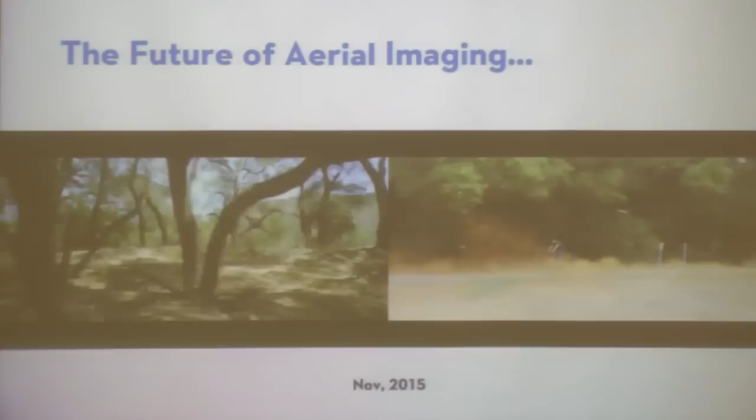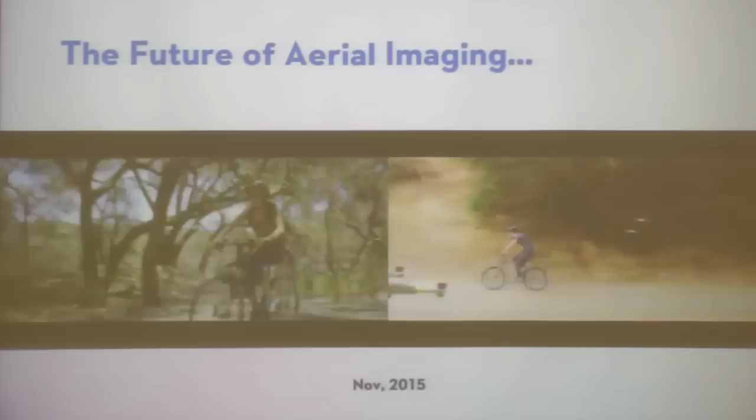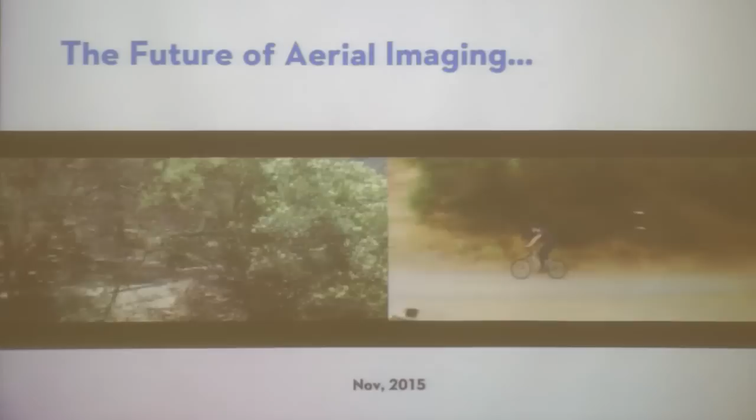This video is an idea that we want to show of what we think of the future of aerial imaging. We think users should focus on content instead of manually operating the system. We want the drone to fly anywhere, even in dense natural environments, and even beyond visual distance. Finally, we think it's very important for a drone to be controlled without a remote controller, but to interact with users in the most natural ways, such as gestures. At this point, actually, we are not making a flying camera.

We are rather making flying robots. DJI, as always, we think ourselves as a robotics company. And Phantom X is not merely a concept, it's a milestone on a roadmap, and we are working on this road steadily.

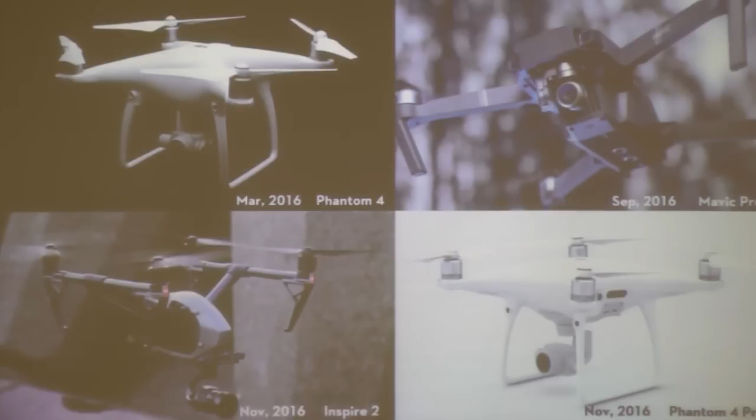So in the following year, 2016, we released 4 products that integrate computer vision and other sensoring technologies that enable them to perform autonomous flights by themselves. These products are Phantom 4 and Phantom 4 Pro, Mavic Pro, and Inspire 2. They come in different sizes and shapes, and their prices are different, and their target users are different.

For example, the Mavic is really small and it's foldable, so it's convenient for people to travel and for people who do outdoor sports to carry it. Inspire 2, on the other hand, is a very large and expensive drone with very professional cameras and other functionalities. Those are for people who want to have high quality video shots.

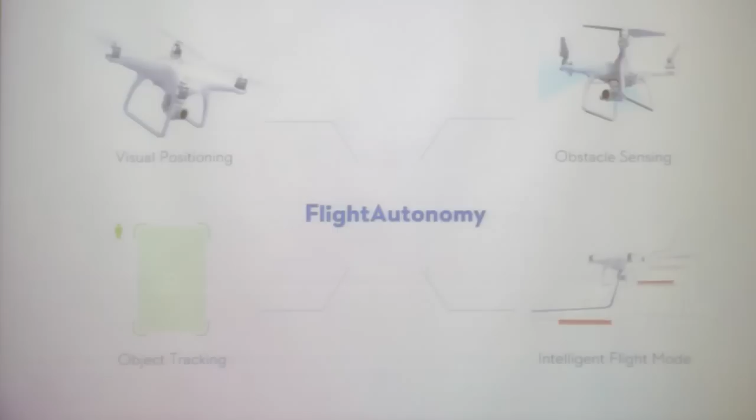The core component of all these systems is called flight autonomy. It's a component that enables drones to be able to visually position themselves in GPS-denied environments, and is able to do object tracking and obstacle sensing. And we built some intelligent flight modes on this component. If we see it from an academic way, then these functions correspond to some technologies such as visual odometry, multi-sensor fusion, depth perception, and also deep learning-based object tracking and detection.

I will introduce these functionalities in the following slides. The first fundamental thing is we build a specialized hardware that contains a bunch of sensors, including multiple IMUs, barometers, magnetometers, and a lot of cameras.

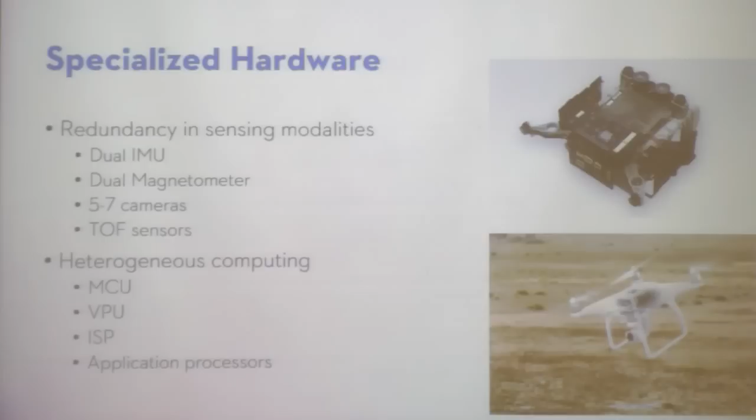And we have a heterogeneous computing platform, consisting of microcontrollers, special vision processing units, image signal processors, and also application processors. In total, there are 24 computing cores on this hardware platform, and we're able to process all the sensor data simultaneously and fully on board.

The first technology we implement on this platform is multi-camera and visual inertial combined visual odometry. We process image streams from 6 or even more cameras, and this image stream will be processed by the hardware, and the result is fused with GPS, sonar, and other sensors to get a full state estimation of the entire system.

The most important part is stereo vision. Actually, the 4 cameras on the system form 2 pairs of stereo vision. One pair is downward facing, and another pair is forward facing. On Phantom 4 Pro, actually, we have a backward facing stereo vision, so in total we have 3 pairs of stereo visions.

As some of you may know, working with stereo vision cameras is troublesome sometimes because the relative position of 2 cameras is critical for your algorithm to perform precisely. When we do research, we know we can always do extrinsic calibrations using a chessboard. But for our product users, people who don't know computer vision, they don't know how to do extrinsic calibrations.

A better example, an interesting corner case, is a person standing still who crouches down. Our deep learning algorithm has a bounding box around the person. If the person crouches down, the bounding box shrinks. At the same time, if the person suddenly runs to a far place, the bounding box also shrinks.

For a monocular-based deep learning algorithm, we cannot tell whether the person has crouched down or moved to a far place. If our controller is aggressive and the person crouches down, the drone might start to accelerate, which can be very dangerous. Therefore, the controller has to be conservative when tracking a person, and able to use other techniques to distinguish whether a person is really moving fast or just crouching with deformation.

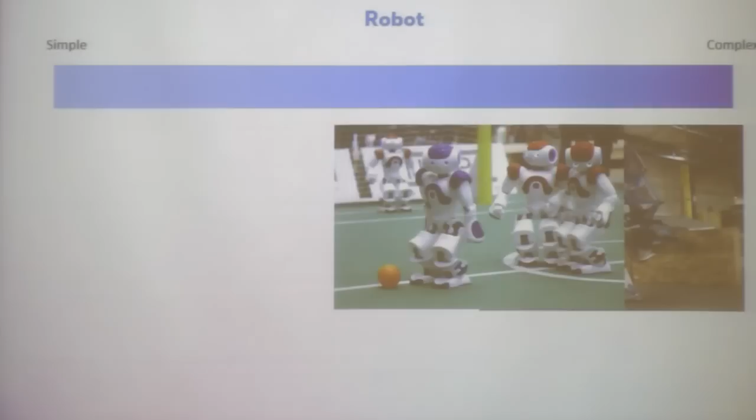We have another spectrum to measure the complexity of robots. Humanoid robots are obviously the most complicated and difficult robots. There are other humanoid robots for simpler applications, for example, football or soccer. DJI drones are also robots, but with simpler configurations. I would point out that a robot built in a lab is always more complex than a robot already in mass production, because in manufacturing industry we have different ways to reduce the complexity of robots. There are also extremely simple robots, for example, Lego robots for kids to study robotics.

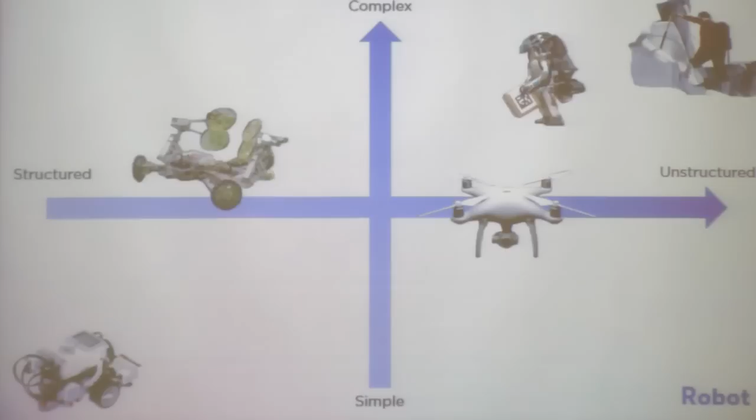If we combine the spectrums together, we get a coordinate system that intuitively helps us evaluate the complexity and difficulty a robotics application can have. On this coordinate system, the third quadrant contains simple and easy to make robots. In the first quadrant are very complicated, very high-tech robots, and human beings are obviously the most complicated ones in this coordinate system. There are drones and ground robots serving different purposes, and we see that we move robots from the third quadrant toward the first quadrant—that's a gradual, improving progress.

We can see this graph in another way: there are tremendous numbers of applications we can build for robots. There are also a lot of different robotics competitions that have emerged in the past decades. We've observed many good robotics competitions where people build robots, and the competition really helps the growth of technologies. We can also place the difficulty of these competitions and the robots involved on this coordinate system.

We have BattleBots, a competition for entertainment where RC-controlled robots fight with each other fiercely. We also have very difficult competitions such as the DARPA Robotics Challenge, where humanoid robots have to work in a nearly unstructured environment to finish a number of complicated tasks. We also have educational competitions such as RoboCup, where robots play soccer with each other. The International Aerial Robotics Competition is famous in the drone research community—it's a competition with a long history that really helps the development of drones.

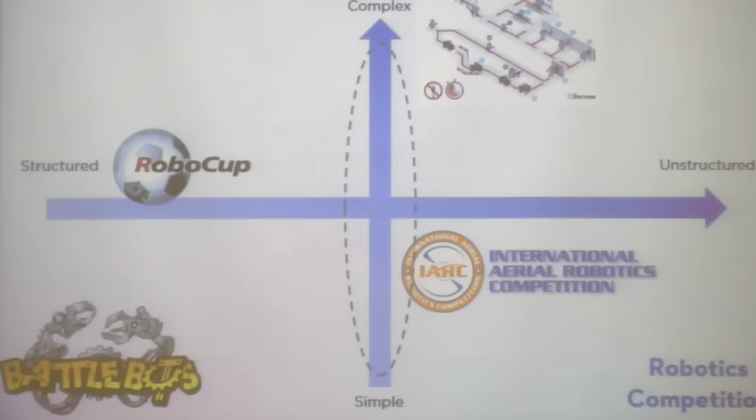For these competitions, we want to ask: even if we don't know what robotics applications we want to work on, we can create a robotics competition that roughly covers this range, meaning we have a relatively fixed environment where we let people build different robots and use this competition as a benchmark for technologies.

That's the purpose of RoboMasters, a competition we made that we hope can sit at the origin of this coordinate system and serve as a benchmark for different robotics technologies.

Next, I will use a video to better help explain the competition. This video is made by The Verge, a US media outlet.

4, 3, 2, 1. This is the world's biggest, most complex, and completely over-the-top student robotics competition. Over 5 days, students from 200 universities around China compete in front of tens of thousands of fans, while millions more watch online. The whole thing takes place inside this colossal stadium in Shenzhen, an arena that usually hosts the country's biggest rock stars.

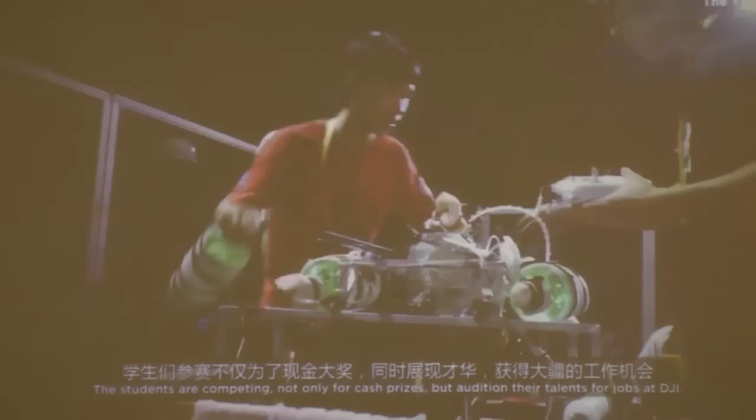It's all being funded by Dajiang Innovation Science and Technology Company. You probably know them as DJI, or at least you know their flagship product, the now iconic Phantom drone. The students are competing not only for cash prizes, but a chance to audition their talents for jobs at DJI. DJI, on the other hand, wants to use this competition to become the most successful robotics company in the world.

This is RoboMasters. This competition is like a battle between robots, so we make some robots to fight against each other.

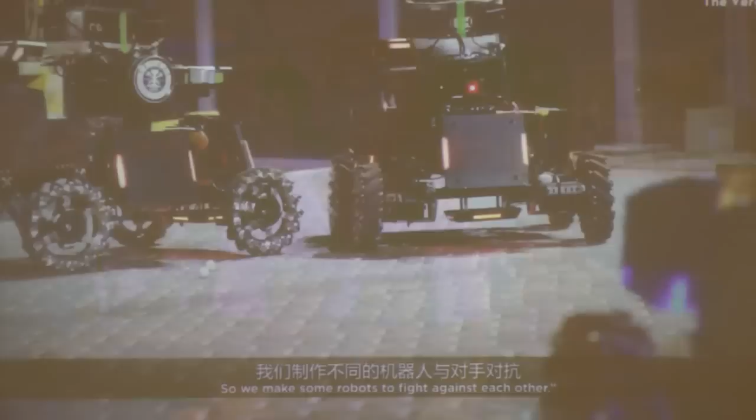Each match pits 2 teams of robots against each other. The units maneuver around the field, collecting power-ups and ammunition, ideally without tipping over. The goal is to reach the opposing team's base station. The robots can shoot at each other with cannons, aiming for small pressure-sensitive plates. Enough hits on those plates, and the bot automatically shuts off.

The teams can also successfully deplete the enemy base station of all its health and win a sudden death.

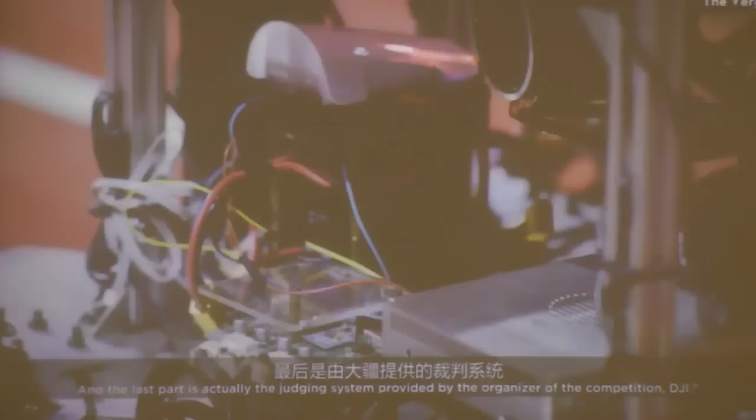Each team will build their own robots, mainly consisting of 3 systems: the driving system, which has 4 wheels to enable the car to move around; the weapon system; and the judging system, provided by the organizer of the competition, DJI.

The judging system consists of different components: sensors to detect incoming damage, sensors for monitoring speed, and cameras.

The view of the camera is transmitted back to the operation room, where the operators use only this first-person view to move their robot.

Every team has 8 robots, including 4 infantry, a hero, a drone, and a base, plus a station that can provide bullets, like a recharging station.

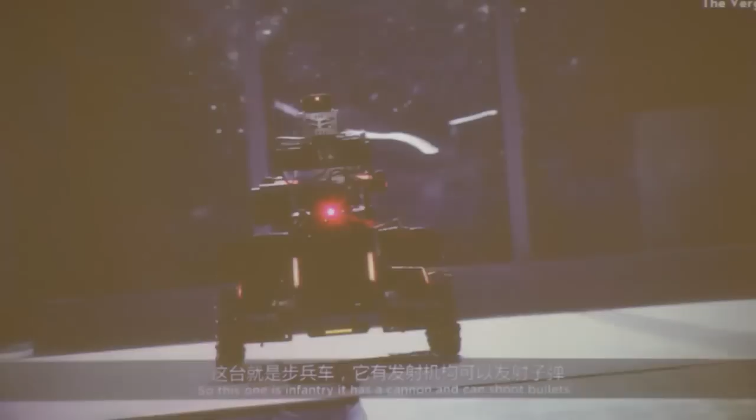This one is infantry. It has a cannon and can shoot bullets, coming from here and shooting out there.

The small infantry robots can only fire little rubber pellets, while the drone and the hero can use golf balls, doing much more damage with every strike. Golf balls are tough to get, and that's on purpose.

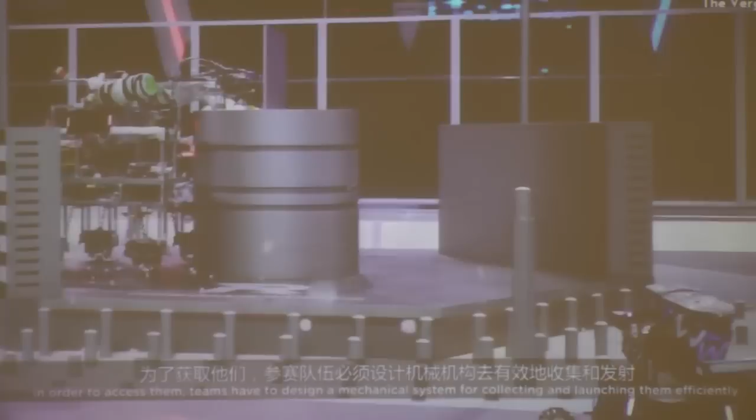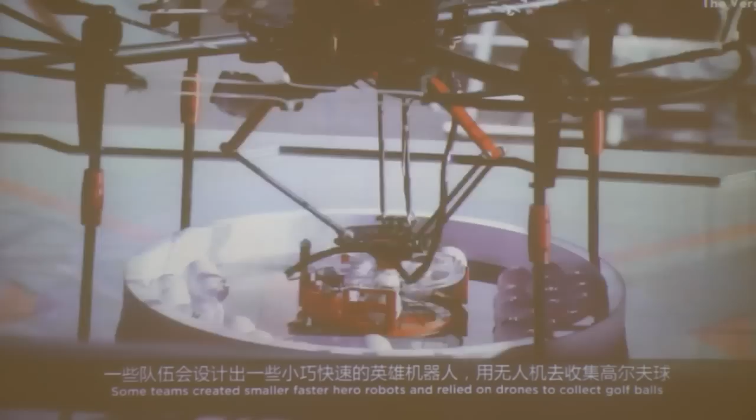In order to access them, teams have to design a mechanical system for collecting and launching them efficiently. Teams that were reliably able to get the golf balls were consistently able to take out the enemy and win the match. Some teams created smaller, faster hero robots and relied on their drones to collect golf balls, using the aircraft to arm their hero or bomb the enemy base.

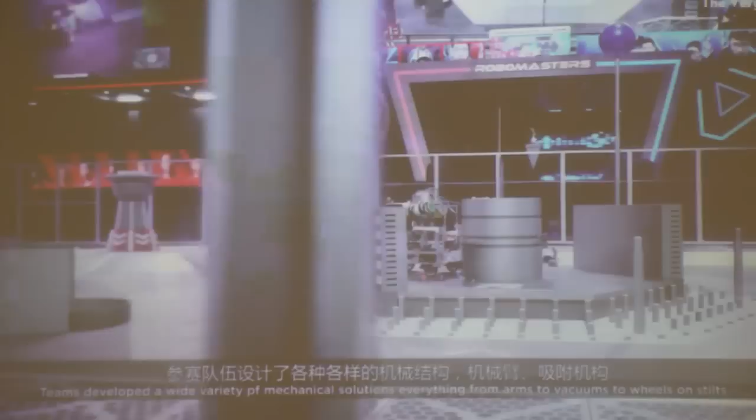Others built large hero robots that could scale a central island, climbing over a sea of spikes. Teams developed a wide variety of mechanical solutions, everything from arms and vacuums to wheels on stilts. The mechanical engineering that went into the tournament was always a big hit with the crowd, but the really high-tech stuff was actually happening out of sight in the software.

We forced students to design the base robot as fully autonomous. The base robot can shoot 17mm plastic balls as well, but it has to do it automatically. In this way, we encourage students to involve these high technologies.

At RoboMasters, computer vision was used to enable an autonomous base, allowing it to identify the enemy and return fire without human help. You could see the way the tournament was designed to make stars out of nerdy teenagers.

The competition featured live feeds of them operating their robots, documentary films on their preparations, and even an anime series that turned contestants into action heroes. RoboMasters made these students larger than life.

I was pushed to the front of the spotlight, right in the center. The first time I saw the poster, I was also a bit shocked. It's amazing to me, and I believe it's amazing to a lot of other people too, especially young children.

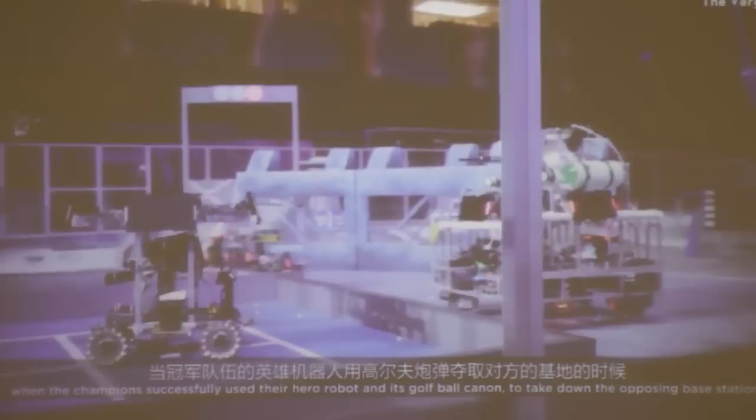Could RoboMasters ever be as popular as a mainstream sport? Will kids one day aspire to be engineers the way they aspire to be rock stars? That remains to be seen. But in the final moments of the competition, when the champions used their hero robot and its golf ball cannon to take down the opposing base station, and the crowd went wild, it sure felt like a roaring success.

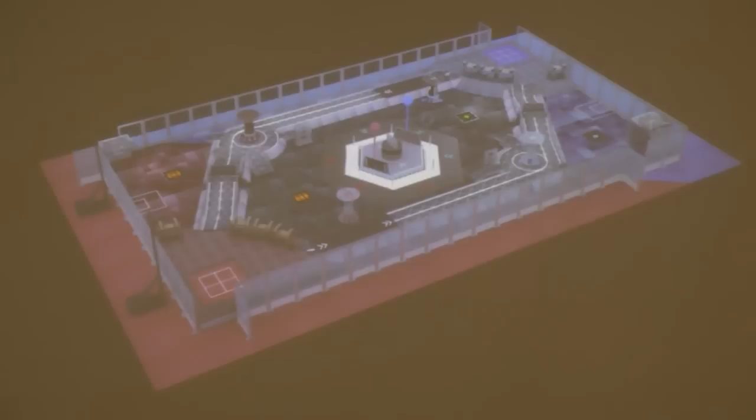What is this competition really about? We designed this place where robots fight with each other. The size of the competition field is roughly the size of a basketball field, and the robots move in the game field. The judge system connects the robots into a central server, and the position of those robots is displayed on the minimap.

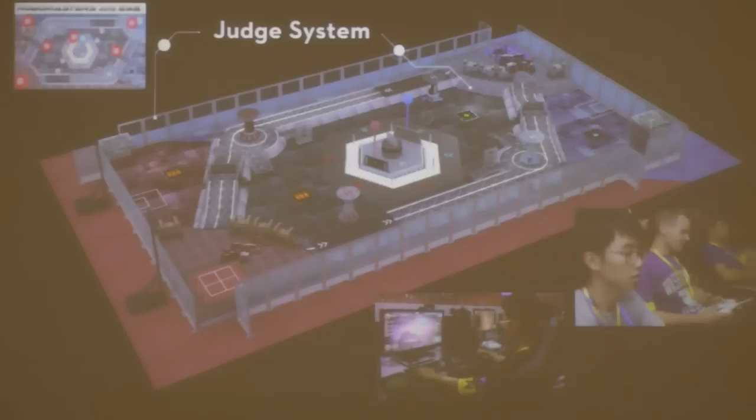We developed a localization system to track the position of all these robots and display them for the audience. Then students just sit next to the game field and operate their system. We have Wi-Fi connections and image transmission technologies to transmit back the image view from their robots.

We carefully designed the game elements in this field to make it a roughly structured environment, but with some uncertainties. All the game elements and the size of the game field are known to the contestants, but those small bullets, golf balls, that teams need to collect bring uncertainty into the competition.

The video explains the role of DJI in this competition very well, but we also did more behind the scenes. We make some components such as motors and development boards, and also a sample robot for students to get a basic idea of how they can get started.

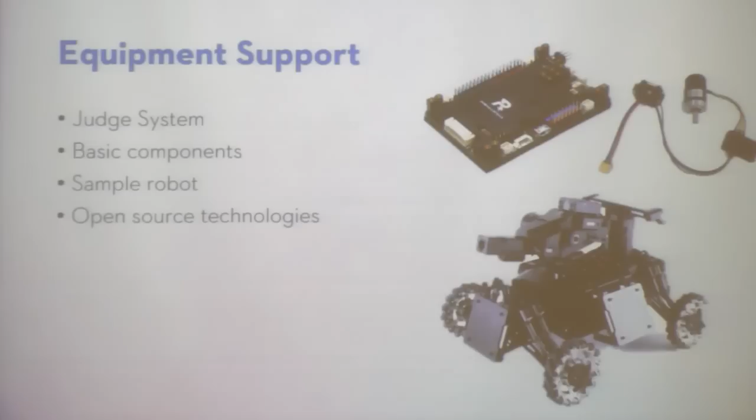There's also the judge system. In the video, it mentions that the judge system has sensors to detect pressure changes. We also built our own image transmission link that is nearly identical to the technologies we use on drones, so that students can get a very good feeling when they operate their systems.

We also open-sourced some technologies that are critical for the competition, for example the target detection algorithm. This one does not involve deep learning, it's basically just geometry-based target detection. But this algorithm provides a good example for students who don't know how to design an autonomous system, helping them get familiar with technologies like this and design an autonomous system themselves.

The competition is more than a simple RC-controlled game because we're constantly adding new technologies and game mechanisms into the competition. For example, in the coming 2017 competition, we add a mechanism that can be triggered by putting these blocks onto a pole.

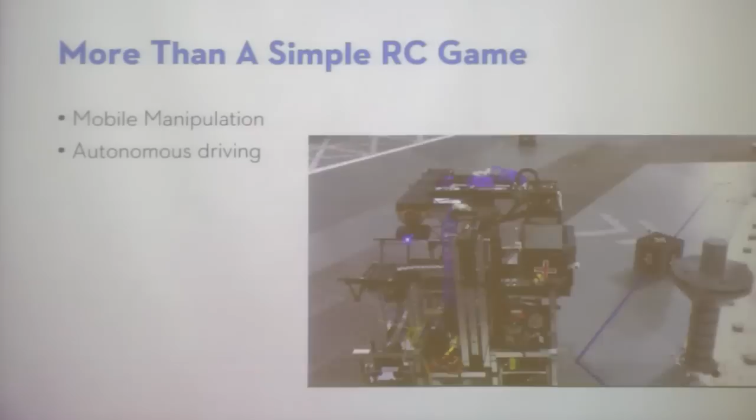And the students make robots like this, an autonomous system that picks up blocks, adjusts its position, and then places them onto the pole.

Since time is limited and this topic was only proposed several months ago, students only made large, bulky robots like this. But we expect that in the future, students can make mobile manipulators with standard robotic arms to achieve this task.

Therefore, when they compete, they make a mobile manipulator able to use an arm to place a box like this. Then outside the competition, they can use the mobile manipulator they created to achieve a real-world task, for example moving parcels and packages in a warehouse or other places.

So we extracted this exact game element out as an individual technical challenge, which will be hosted at ICRA this June in Singapore. We call it the DJI Mobile Manipulation Challenge. We hope to attract graduate students and professionals who are interested in manipulation technologies and building robots like this.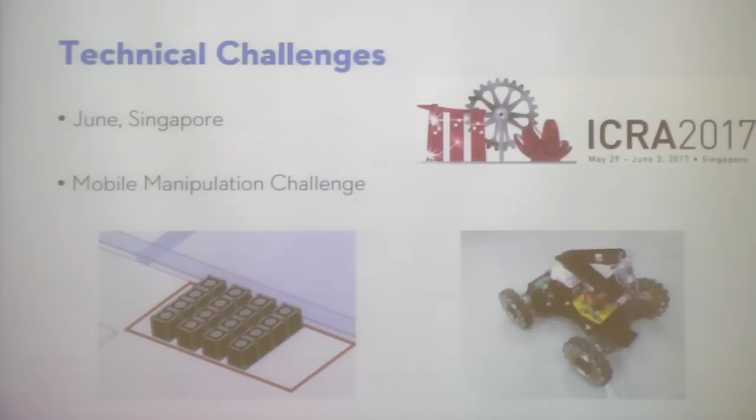From a competition like this, we can also verify in the main RoboMasters competition what game strategy would best fit the needs of the game.

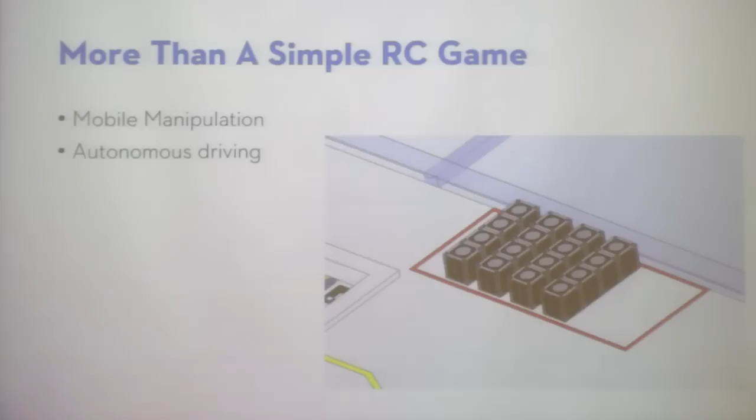Question: is the pivoting operation just grip and force control? Sorry, are you referring to the previous video? Yes, this video is purely... Just modulating grip and force? No, this one has no force detection, it's a completely kinematic measurement because the blocks have labels on them, so we're able to grip without force control. I think they hard-coded the behavior. It's not force-closed.

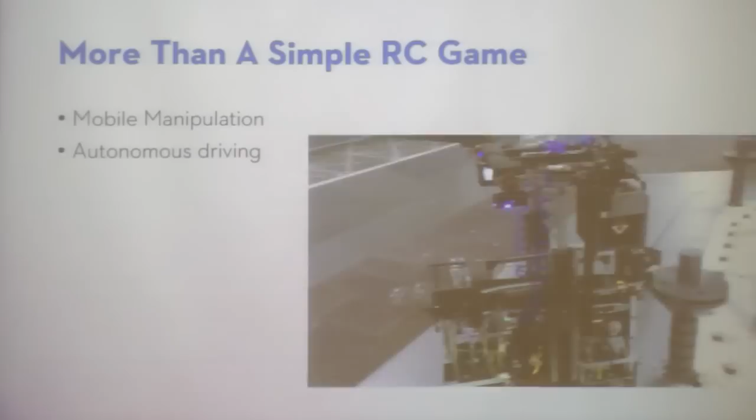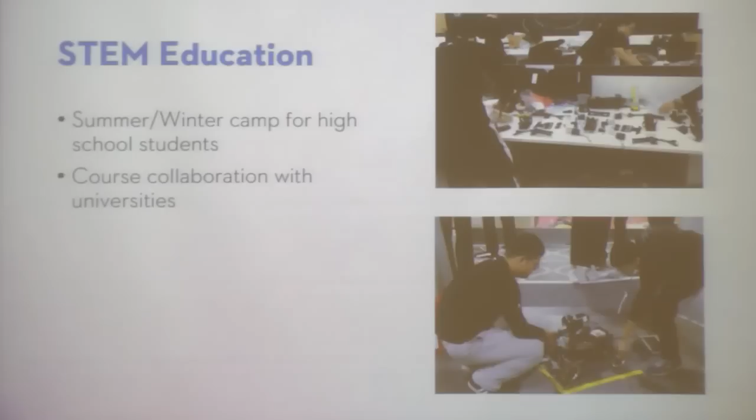This competition can actually be lowered to high school students. In the past winter vacation, we hosted a winter camp for high school students in China. We provide a basic sample robot and let them write their own embedded program on this system. With the help of our engineers and the materials we provided, high school students are able to make a completely autonomous system that can move in a certain area, find targets, and autonomously track and shoot bullets on that target.

Therefore, we think we can dig more from this competition and make it an educational program for high school students. I'd like to share an idea from a website called Better Explained, where there are two ways to teach students how to learn knowledge. One way is called progressive.

For example, in college we study calculus, then linear algebra, then multivariable calculus, and so on. Usually students don't know what the relationship is between these courses. That is the progressive manner.

But if we use a coarse-to-fine method to teach knowledge, we can let students first build a simple robot, where they may only need to take a few courses to complete the system. Then there are more difficult robots, maybe with target tracking or computer vision-based algorithms in them, and students need to take more courses to make this robot.